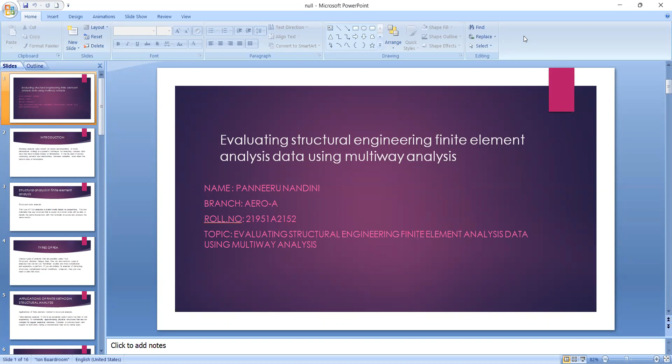Today I'm going to explain the topic of evaluating structural engineering finite element analysis data using multi-way analysis. Introduction: Multi-way analysis, also known as tensor decomposition or multidimensional scaling, is a powerful technique for analyzing complex data sets that have multiple modes and dimensions.

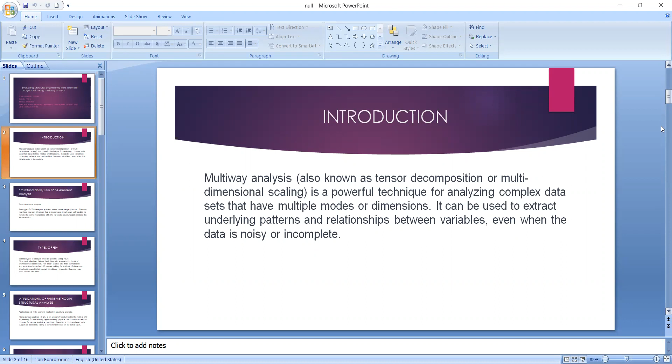Structural analysis in finite element analysis: structural static analysis. This type of FEA analysis uses a scaled model based on proportions. The test maintains that any structure that is sound on a small scale will be able to handle the same interactions with the full scale structure and produce the same results.

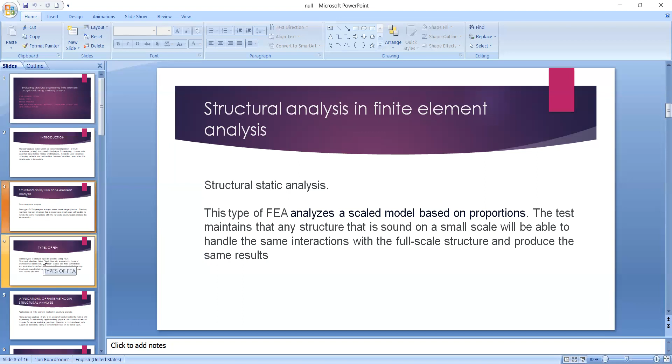Types of FEA: various types of analysis possible using FEA include structural, vibration, fatigue, heat, flow, etc. These are common types of analysis that can be run. Nonlinear studies are more complicated and expensive to perform. If you are looking for analysis of deforming structures, complicated contact conditions, creep, etc., then you may need to take this route.

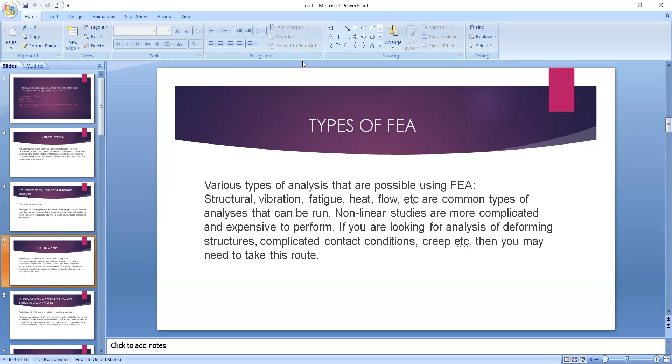Applications of finite element method in structural analysis. Finite element analysis (FEA) is an extremely useful tool in the field of civil engineering for numerically approximating physical structures that are too complex for regular analytical solutions. Consider a concrete beam with support at both ends facing a concentrated load on its center span.

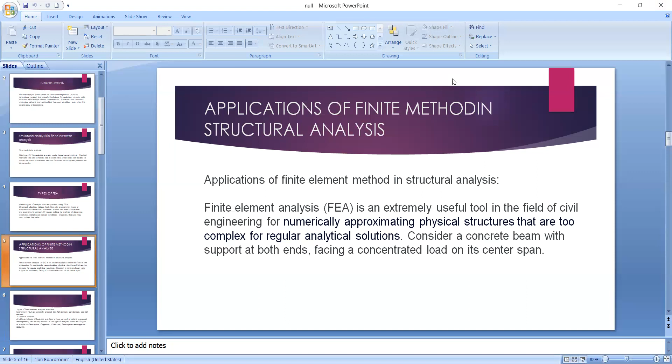So finite element analysis elements are grouped into 1D elements, 2D elements, and 3D elements.

5 types of analysis at different stages of business analytics. A huge amount of data is processed, and depending on the requirement of the type of analysis, there are 5 types of analytics: descriptive, diagnostic, predictive, prescriptive, and cognitive analytics.

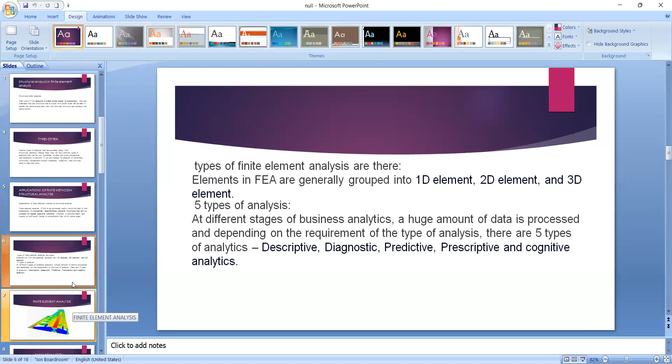Finite element analysis. Applications of FEA: we use it to calculate the stresses in highly loaded components in the aerospace, nuclear, defense, medical, chemical, and offshore industries to identify the risks of failure.

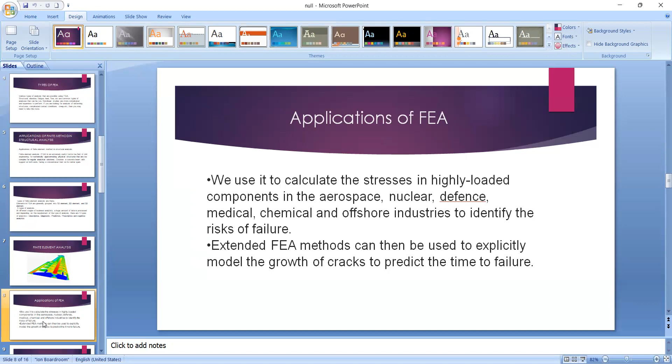Extended FEA methods can then be used to explicitly model the growth of cracks to predict the time to failure. By coupling with acoustic or flow solvers, we can calculate the stresses caused by high frequency vibrations in chemical process systems and hence their fatigue loads.

We use the same fundamental method to calculate the surface electropotential of subsea equipment to optimize the design of passive or active cathodic protection systems.

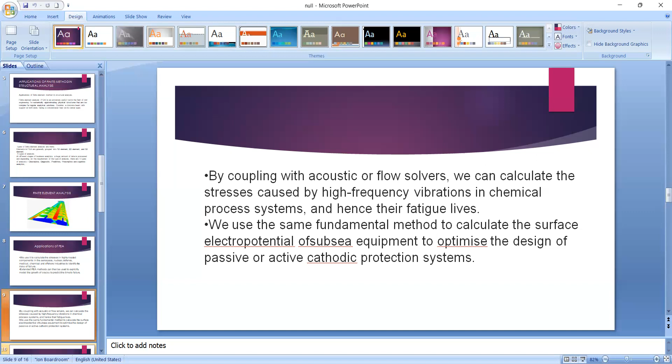Text of structural engineering finite element analysis data: Multi-way analysis can be used to identify important modes of variation that affect the behavior of the structure under different loading conditions. For example, it can be used to identify the most important modes of deformation in a bridge or building, or to analyze the behavior of different structural components under different types of loading.

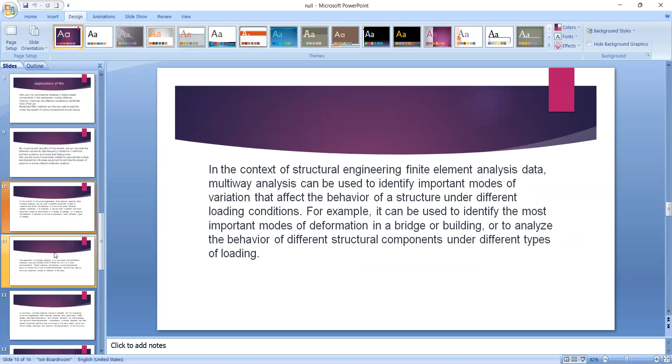One approach to multi-way analysis is to use tensor decomposition methods such as CANDECOMP, PARAFAC, or Tucker decomposition. These methods decompose a multi-dimensional array into a set of lower-dimensional factors that capture the most important modes of variation in the data.

Multi-way analysis can be a valuable tool for evaluating structural engineering finite element analysis data, particularly when dealing with high dimensional and complex data sets. By decomposing the data into lower dimensional components, multi-way analysis can help identify important patterns and structures in the data, which can in turn inform design decisions and improve the performance of the structure.

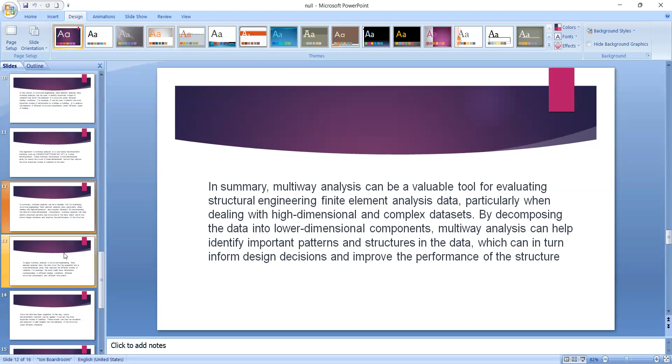Apply multi-way analysis to structural engineering finite element analysis data: the data must first be organized into a multi-dimensional array that captures the different modes of variation. For example, the array might have dimensions corresponding to different loading conditions, different structural components, and different time points. Once the data has been organized in this way, tensor decomposition methods can be applied to extract the most important modes of variation. These modes can then be visualized and analyzed to gain insights into the behavior of the structure under different conditions.

Once the data has been organized in this way, tensor decomposition methods can be applied to extract the most important modes of variation, which can then be visualized and analyzed to gain insights into the behavior of the structure under different conditions. To apply multi-way analysis, the data must first be organized into a multi-dimensional array that captures the different modes of variation, with dimensions corresponding to different loading conditions, different structural components, and different time points.

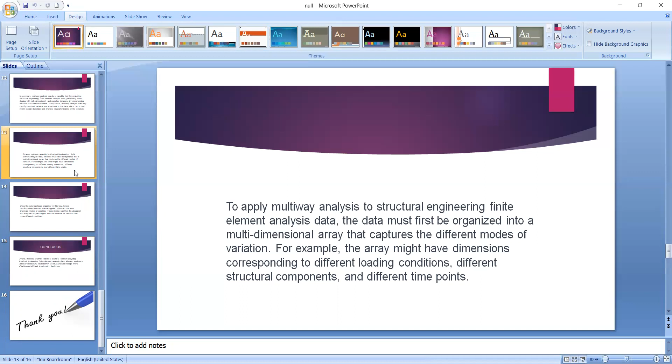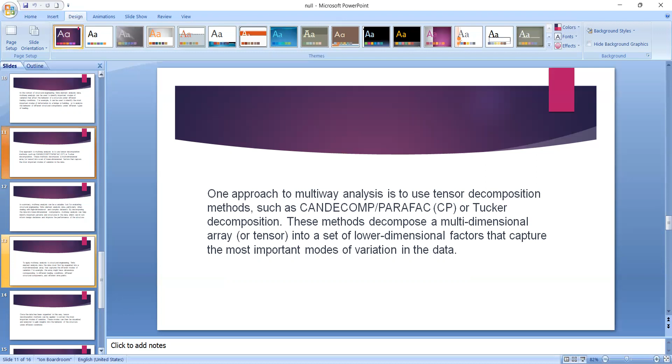Once the data has been organized in this way, tensor decomposition methods can be applied to extract the most important modes of variation. These modes can be visualized and analyzed to gain insights into the behavior of the structure. One approach to multi-way analysis is to use tensor decomposition methods such as CANDECOMP, PARAFAC, or Tucker decomposition. These methods decompose a multidimensional array or tensor into a set of lower dimensional factors that capture the most important modes of variation in the data.

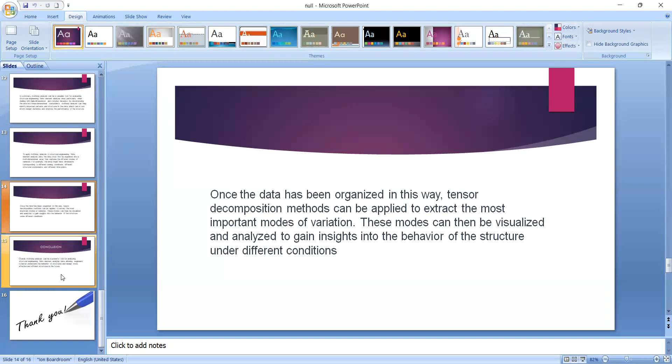Once the data has been organized in this way, tensor decomposition methods can be applied to extract the most important modes of variation. These modes can be visualized and analyzed to gain insights into the behavior of the structure under different conditions. Conclusion: overall, multi-way analysis can be a powerful tool for analyzing structural engineering finite element analysis data, allowing engineers to better understand the behavior of structures and design more effective and efficient structures in the future.